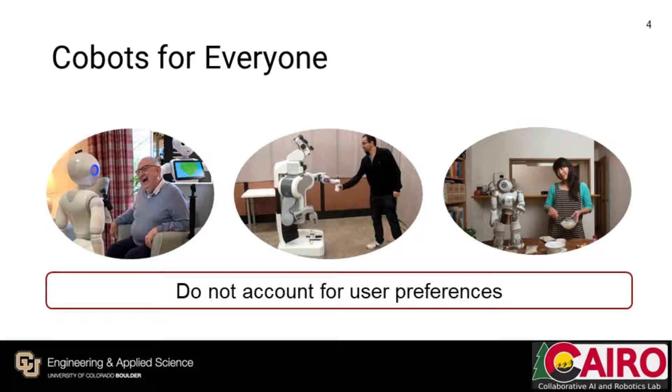Additionally, collaborative robots are going to be deployed for everyone, not just factories, such as in assistive robotics, elderly care, or household tasks. While working closely with people, these systems need to adapt to preferences of different users. For example, if robots get too close while cleaning the house, some users might find it uncomfortable. These preferences cannot be coded beforehand since they are specific to individual users, so the ability to account for user preferences is also something lacking from current systems.

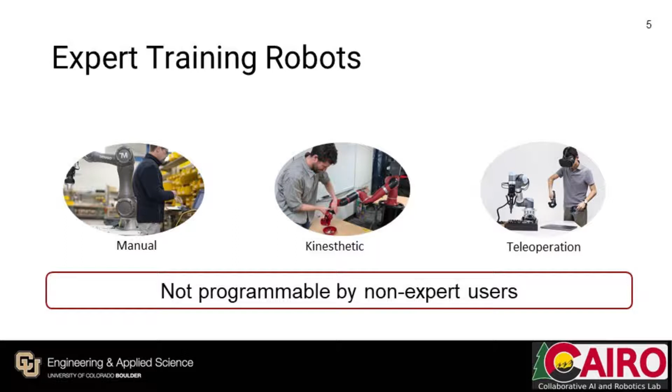Finally, as these robots are going to be used by everyone, they are prohibitively difficult to train and need experts training them. We have moved from manual programming approaches to learning-from-demonstration approaches, but even these, such as kinesthetic teaching and teleoperation methods, are not user-friendly to non-expert users. To summarize, current collaborative robots lack the ability to handle changes in environment, are not readily accessible to handle user preferences, and are not easily programmable for non-expert users.

In this work, we introduce PARSEC: Plan Augmentation and Repair through Semantic Constraints, an algorithm for enabling people to use natural language for more easily selecting, annotating, refining, and parameterizing constraints on robot motion plans. PARSEC empowers non-technical users with access to constrained motion planning techniques, providing a route to safer, correct-by-construction robot skills regardless of the underlying model.

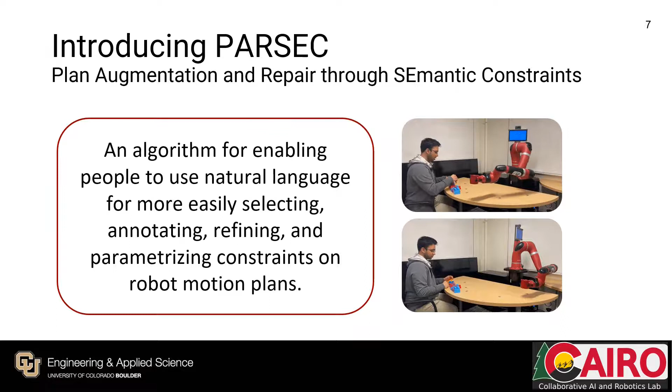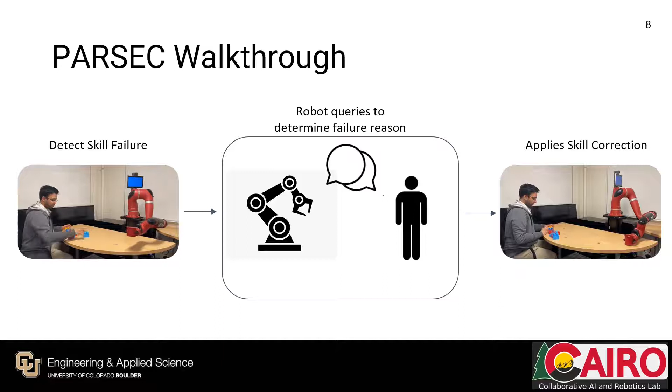To give a broad overview of how PARSEC works: first, our system detects skill failure, as shown in the video clip on the left, where the robot's arm is very close to a person while clearing the table. When the system notices skill failure, it queries the user to determine the reason for failure. Users are interactively guided through the constraint annotation process through semantic interaction. Once the reason is determined, the robot can apply skill correction to successfully execute the task, as shown in the right video clip, where the robot maintains a safe minimum distance from the human.

To give an example of how constraint annotation, or the interaction between human and robot, looks like: first, the robot asks a very broad question on failure to get initial feedback on skill correction. For example, it can ask, 'Did I do something wrong?' Based on the feedback the user gives, it can determine the root cause of failure by iteratively questioning the user.

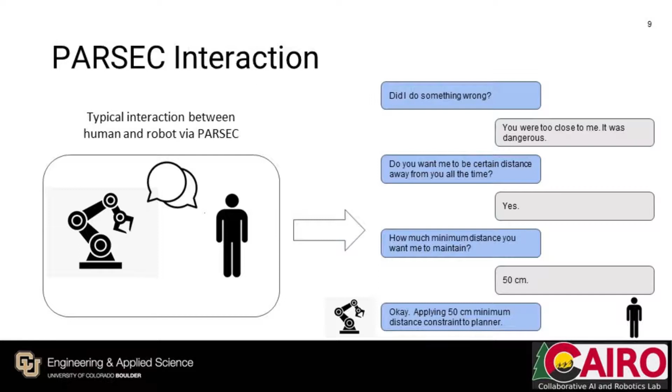Here you can see the human replies, 'You were too close to me,' and then the robot finds that the human wants it to maintain a safe distance of 50 centimeters at all times. Finally, after determining the constraint the user wants to apply, PARSEC can successfully apply the constraint to its motion planner.

Before we dive deeper into PARSEC's formulation, some preliminaries we need to know: PARSEC is a post hoc method, meaning it is applicable when the learning agent has already been trained to execute a specific task in the training environment. To illustrate, if a robot is tasked with cleaning, it should know the cleaning task beforehand.

Users can add preferences such as how close the robot can work with them or where things can go, and so on. Furthermore, PARSEC is independent of the underlying learning model, as it is applied post hoc.

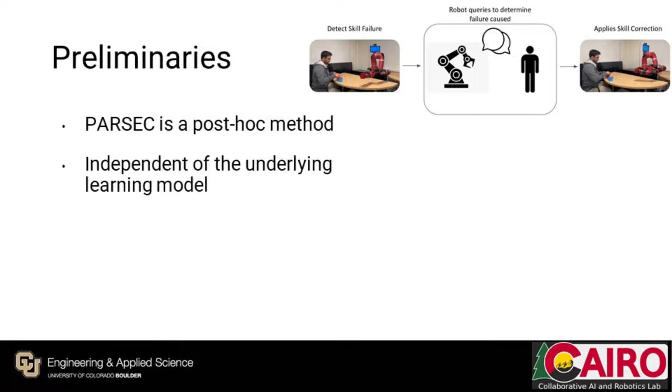For our implementation, we use Concept Constraint Learning from Demonstration, or CC-LfD, from Mueller et al., an extension of kinesthetic keyframe-based LfD that allows addition of high-level constraint information to demonstration data. These constraints are high-level concepts encoded as Boolean signals, such as 'keep the cup upright' or 'keep minimum distance,' which are not modeled by robot state data alone.

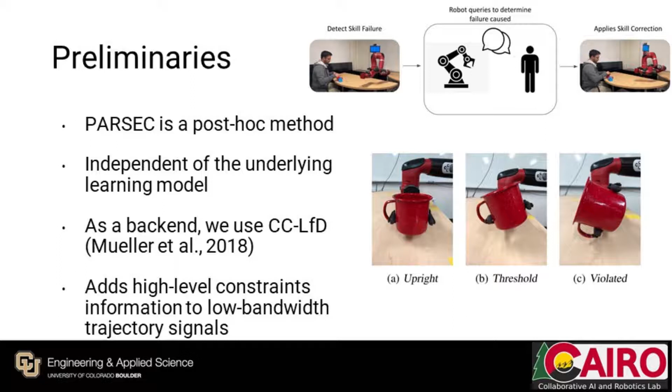To get into the details of PARSEC's algorithm and flow: first, the robot executes the skill alongside the human teammate and observes the human for skill completion. If it detects no skill failure, it does nothing.

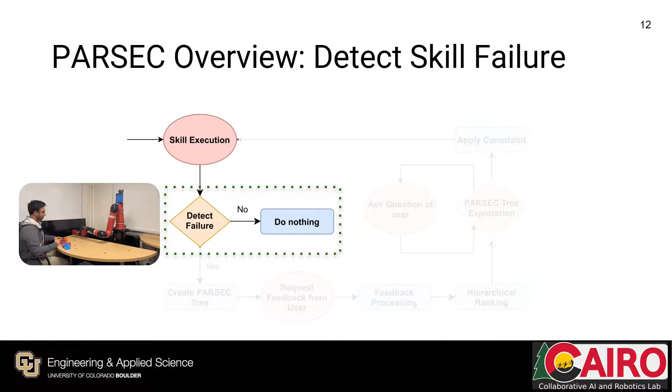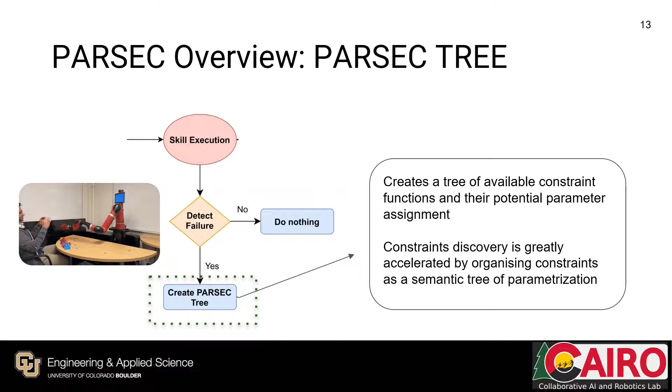If it detects a skill failure, as shown in this clip where the robot is working too close to the user, our system creates a PARSEC tree. The PARSEC tree is a tree of available constraint functions and their potential parameter assignments. The core insight is that by structuring constraints using constraint functions, we can significantly accelerate constraint discovery.

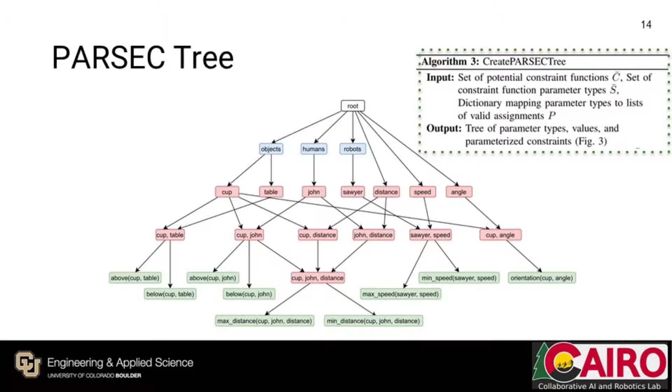To improve the search of constraints further, we utilize feedback from the users, which is divided into 3 steps: requesting for the feedback, processing the feedback, and using that to rank the tree nodes.

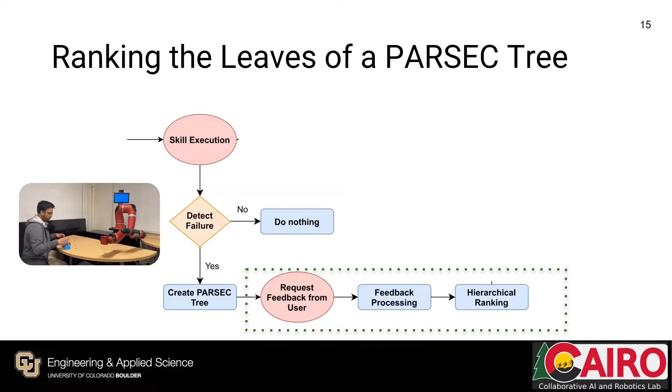In the feedback step, the user is requested to provide general information on how the skill can be corrected, and this open-ended explanation is parsed by our NLP engine to score each node of the tree.

For example, if the robot's domain knowledge consists of the words computer and person, and the user provides the explanation that don't move near the computer, the scoring process will give a high value to the computer and a low value to the person.

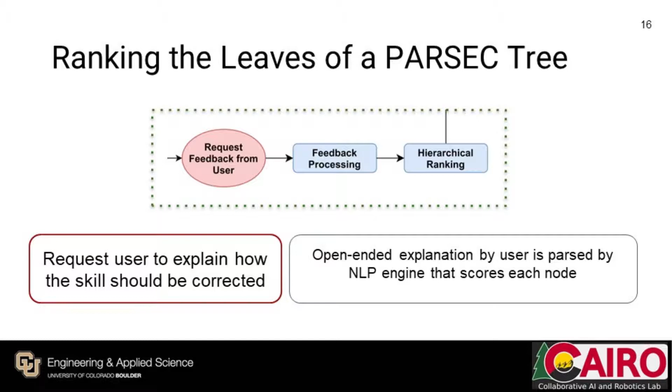Once the ranking of the nodes is done, they are sorted by the score, and we use it iteratively to ask the user to hone in on the desired constraint by traversing the tree.

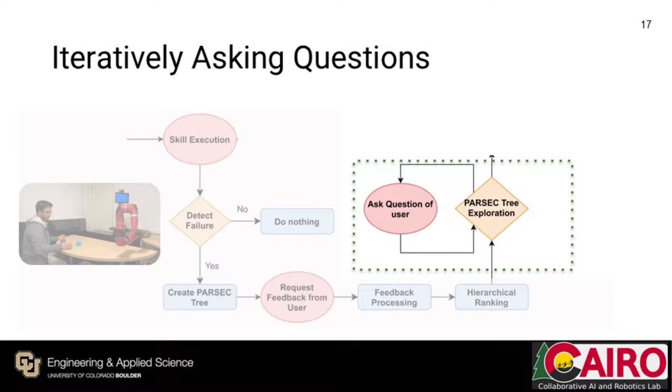And as soon as we confirm the desired constraint from the user, the agent can apply the constraint to the motion planner.

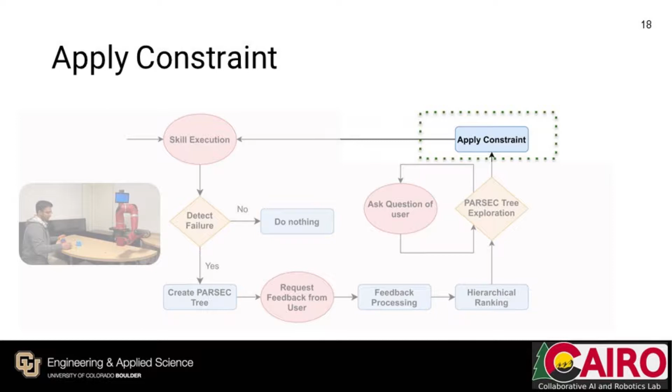We repeat this process all over again, correcting one constraint at a time to improve the skill. With this, we can guide users to semantically modify or adapt the robot's plan to successfully execute them.

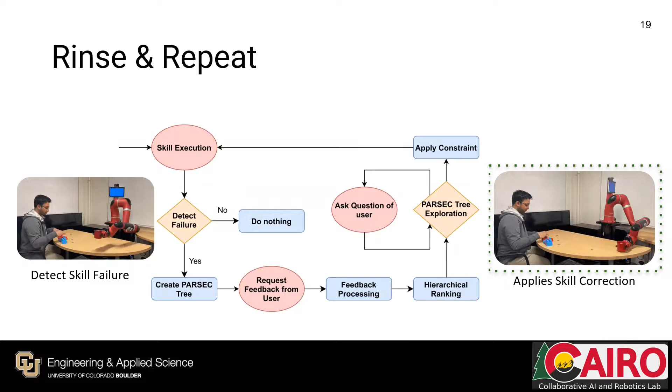To evaluate the novel capability of Parsec, we developed 3 case studies. Each involved correcting a general purpose skill using different approaches and comparing them.

For the case studies, each skill was trained with CC-LfD for both success and failure. The failure case was achieved by removing an important constraint which the system needs to find from the user's feedback.

We recorded videos for both these cases and allowed participants to watch them through the survey. They were allowed to watch it as many times as they can, and participants were asked to describe how each skill can be corrected using a single sentence explanation.

We initially had 19 responses, but we had to discard one participant's response as they did not follow the instructions that were given to them.

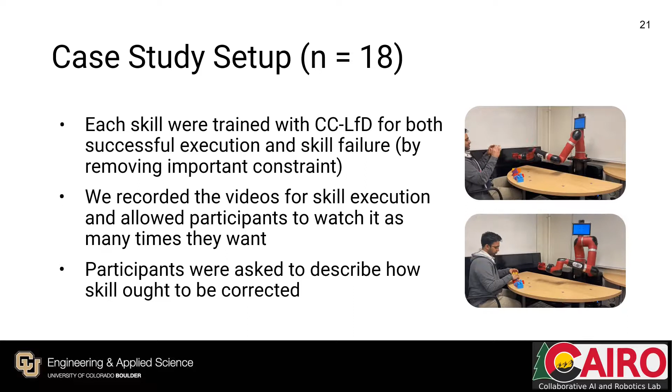Going into tasks, we had a handover task where the robot attempts to give a cup to a user but spills the contents in the process. This is an example of faulty training where the training model does not have the constraint of keeping the cup upright.

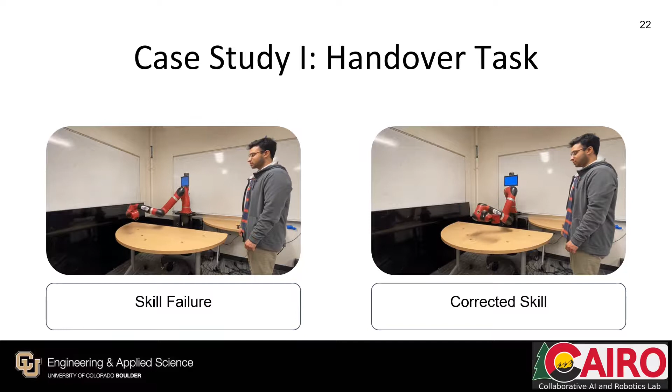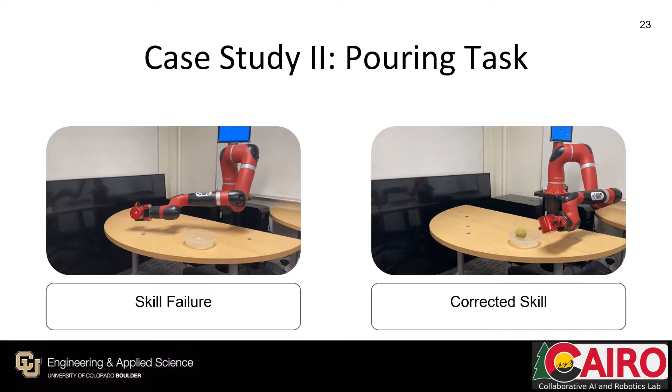The second task is the pouring task, where the robot is tasked with pouring contents into a receptacle on the table. Although the skill has been properly trained, the receptacle has moved from its position during the training. So the robot pours the content in the wrong position over the table.

This demonstrates a situation where the skill has been correctly trained, but not robust to the changes in the environment. A constraint that requires the cup to be above the receptacle during the pouring motion will correct the skill.

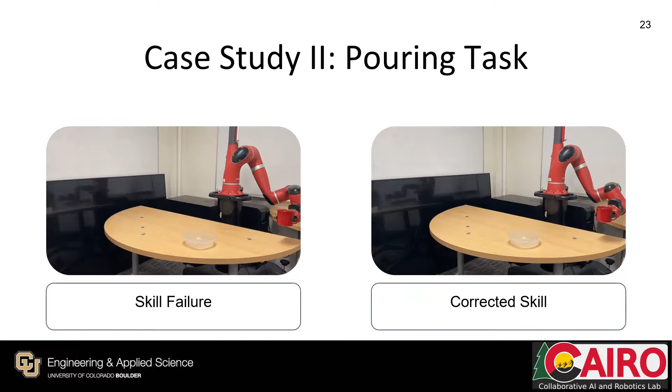And the final task is the cleaning task, where the robot moves a cup across the surface of a table in front of a user who is performing another task.

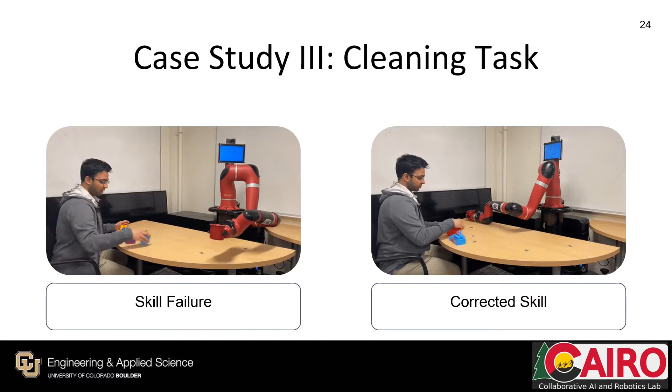As you can see, the robot moves too close to the user, causing discomfort. This scenario represents an example of training that does not represent the user's preference for how a robot should act when it is working in close proximity.

We use three different approaches to evaluate. First, the NLP method or semantic baseline, which iteratively queries each leaf of the parsec tree based on ranking scores. It is simply going through all possible constraints that are available based on ranking score.

Second is the tree method or naive exploration method, which uses the parsec tree for exploration without using the ranking mechanism. Finally, we use the full parsec algorithm with tree scores.

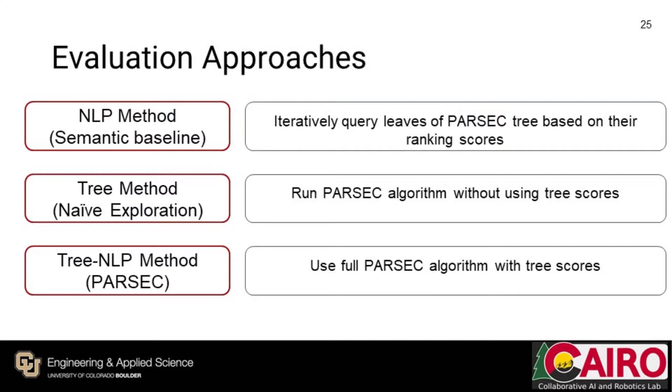For the evaluation, what we do is that we use the explanations we got from the survey and apply one of the three methods for asking questions.

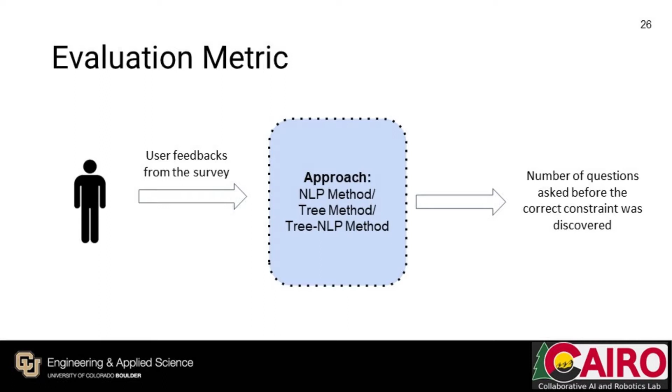We calculate the number of questions asked before the correct constraint was discovered, and that is used as our evaluation metric.

We had two hypotheses going into this. First, we hypothesized that the number of queries in the parsec condition will be lower compared to the other conditions.

And second, we also hypothesized that naive exploration parsec tree and full parsec algorithm will outperform the semantic baseline. The intuition behind the second hypothesis was that using the parsec tree data structure would reduce the time to find the constraints.

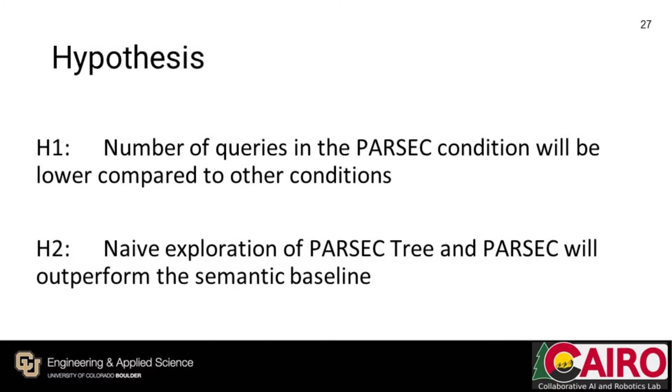We ran ANOVA between the three conditions and found statistical significance in all three conditions, proving hypothesis 1 that the parsec algorithm needs the least number of questions to discover the constraint compared to the other approaches.

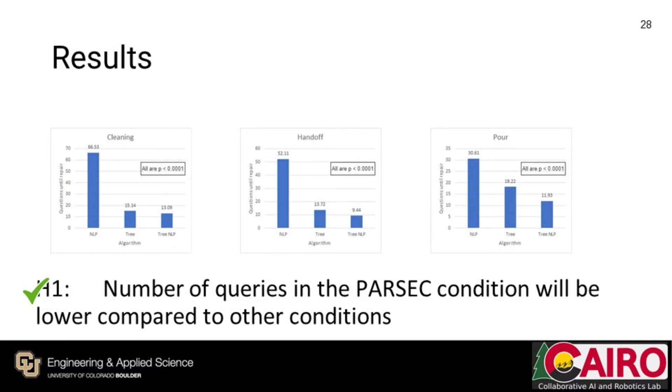Similarly, we can see hypothesis 2 was proved with statistical significance, that is, using the parsec tree data structure reduces constraint discovery significantly.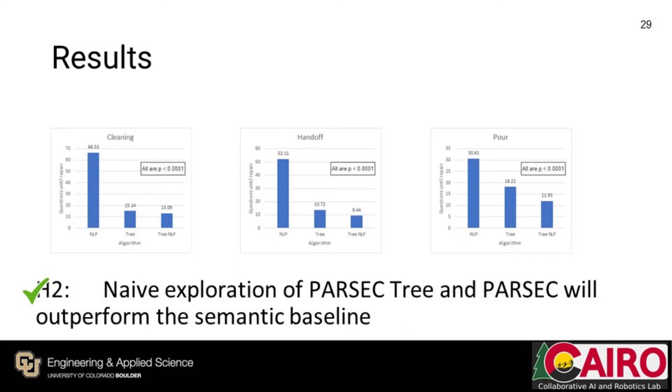To summarize, what PARSEC enables today is that it empowers novice users without prior experience in robotics to access constraint motion planning, and it also allows users to incorporate unique preferences and changes in the environment that happen during runtime.